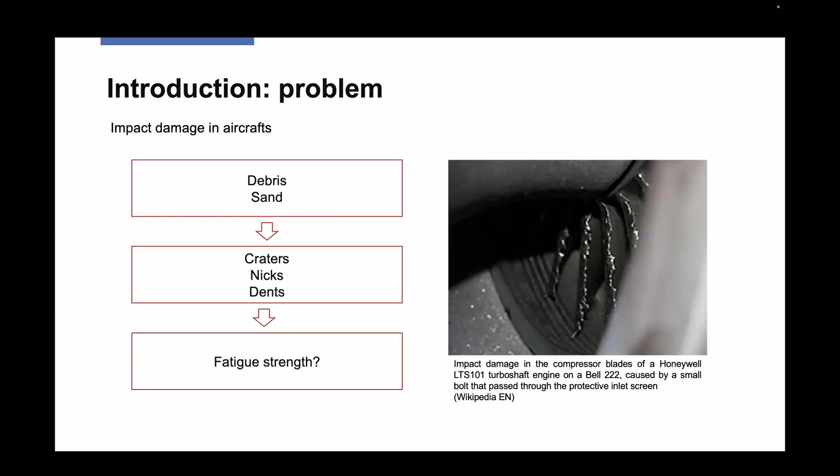So which are the mechanisms involved? We have the appearance of microcracks, of microstructural damages, and the appearance of stress concentrations that, as known, decrease the fatigue strength of components. But we have also the introduction of residual stresses that can improve or decrease the fatigue strength of the components, according to whether they are tensile or compressive. In case of compression, we have an improvement. In case of tensile stresses, we have a decrease.

It is the same mechanism of shot peening, more or less. In shot peening, you have a global effect, so all the surface of the component is under compression, or the area a little bit below the surface. In the case of foreign object damage or impact damage, you have a localized effect. So you have tensile stresses that are dangerous. In literature, the studies focus on plane and airfoil geometries, as just seen.

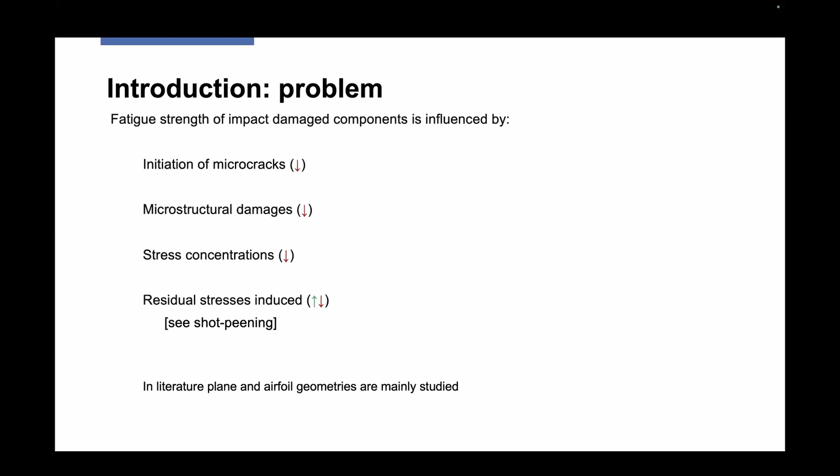And now we want to study other geometries. For example, for some years we have been studying the case of the impact of a sphere against an hourglass specimen made of 7075 aluminum alloy that is used in aircraft engineering. We are using an hourglass specimen because the objective is then to test this specimen under rotating bending loading and to assess the fatigue strength.

So in a previous conference in Dubrovnik, we presented a work on the study with a design of experiment technique, the Taguchi method, applied on the finite element results of some simulations. And in particular, we studied macroscopically the effects of the impact parameters on the stresses after impact in the axial direction. In the axial direction because we want to test this specimen with rotating bending stresses or cyclic axial stresses. We studied the effect of the impact speed.

We tested two levels of impact speed, of the material of the ball, steel and ceramic, the diameter of the ball, two impact angles, alpha and beta, that are measured on two planes perpendicular to each other, and the parameters E1 and E2 are the empty factors. So factors that formally have two levels, 1 and 2, but in practice they are 0. And they are used because after processing according to this methodology, you can see if you have forgotten some significant parameter: if the result of your calculation is that, for example, E1 is the significant parameter, then in your study you have forgotten something.

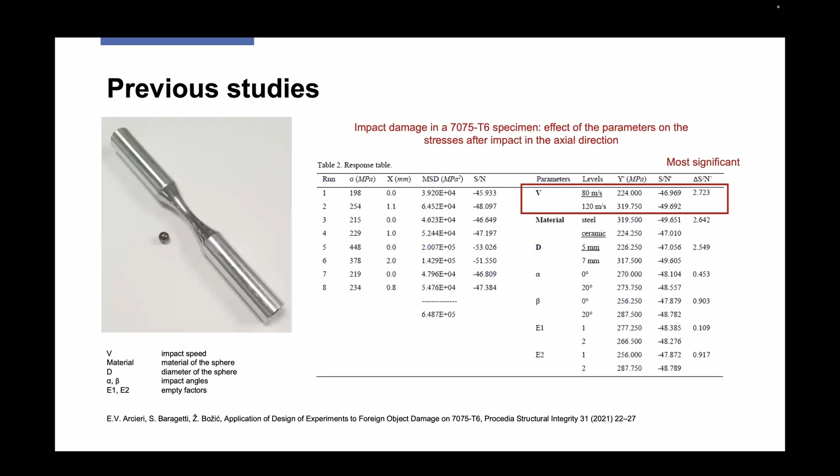And so for this reason, the objective of the presentation of today is to discuss how the impact speed influences the damage in a 7075-T6 hourglass specimen, to find the trends. And due to the fact that we have found that the impact angles are not as significant as the impact speed, we are considering only normal impact.

Here we have the finite element model created for the impact simulation. We have the hourglass specimen that is made of aluminum alloy with the mechanical properties reported. We used an elastic, perfectly plastic behavior. And then we have this sphere that is modeled as a rigid component. And so the inertial properties are set to the center of the sphere.

The boundary conditions are based on the test rig that we have in our lab. So the cylindrical parts are fixed in the specimen holder with 2 set screws. And we have placed the sphere very close to the hourglass specimen because we are neglecting the effect of air and gravity.

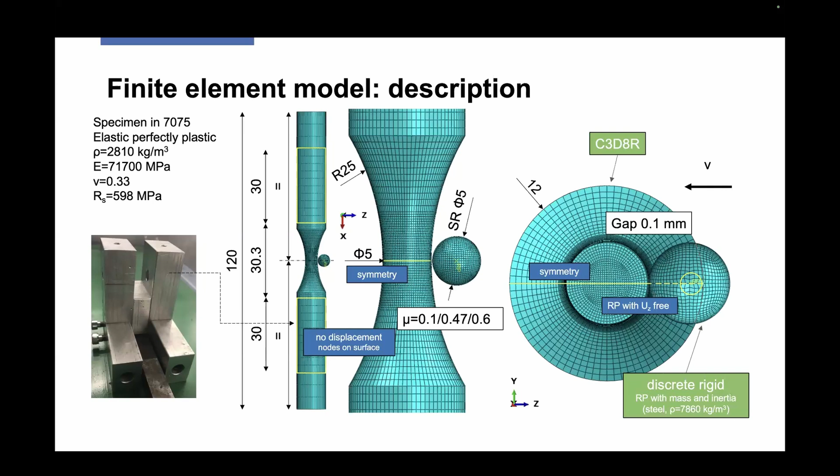Air and gravity. Sorry.

Okay, so we validated this finite element model for one impact case, an impact velocity of 100 meters per second. And here you can see what happens after the impact if we load the specimen with a rotating bending moment. So you can see different bending moment positions.

And first of all, you can see that the critical area, comparing with the results of the fracture surface of the tested specimen, is that we have crack appearance in the areas where the maximum axial stresses occur during a loading cycle. We simulated only one cycle using a static calculation.

And then we have also cracks propagating from the surface of the dent created by the impact, but we haven't simulated micro damages, and we have only an elastic, perfectly plastic material behavior, so we don't simulate it. What we can observe is this area where there is a step discontinuity.

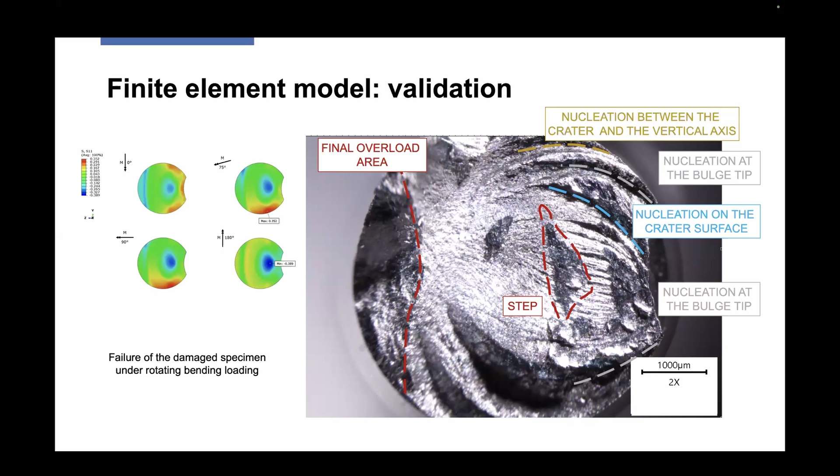This area, according to our finite element results, is subjected to compression during the whole loading cycle. So the appearance of the discontinuity can be due to the resistance provided by this area of compression. There is a time in which this area is surrounded by tensile stresses, and so the discontinuity appears. This finite element model, I repeat, was validated only for one impact speed.

So let's go to the objective of this presentation. We studied the influence of the impact speed on the dent depth, and as we can see, the trend can be parabolic or cubic. The R square values are very, very close to 1. But if we neglect the small impact speed, you can see that the parabolic trend is good. We have only a very, very small variation in R square.

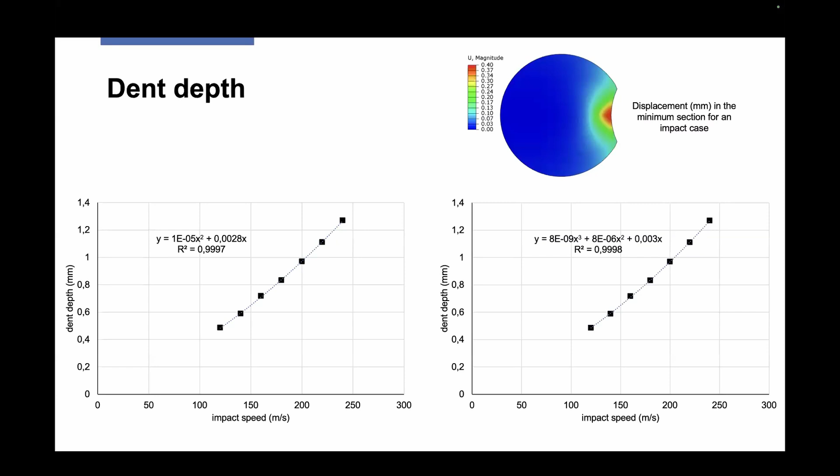What is strange is what happens to the axial stresses. Here we can see the trend for axial stresses in the whole specimen and in the minimum cross section where the highest stresses are expected to occur during the fatigue loading. So you can see that we have an increasing trend for very small velocity, then a decreasing trend, then again it increases and decreases.

It's a strange trend, and maybe there are a lot of motivations to explain it. First of all, the material law used, that is elastic, perfectly plastic. So we have a saturation of the stresses that the specimen can support. So when we have the elastic recovery, we have this trend.

The second reason can be that it is not the case of the impact of a sphere on a plane, for example, but when the impact speed increases, the area that resists the penetration is higher in this area, for example. Here, this area is a little bit higher than the area in the minimum cross section. And then we have a cooperation of a larger part of the specimen due to the higher penetration. So these are at the moment the possible reasons.

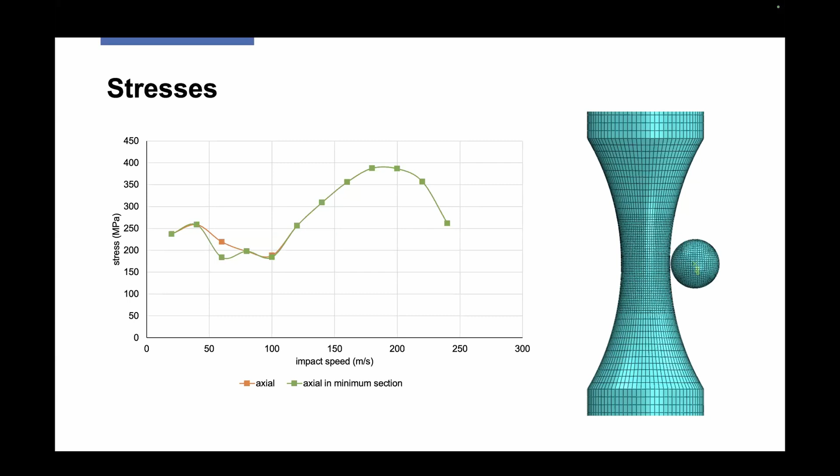Then we have no simulation of micro damages. It's possible that at high speed we have micro damages, and also some portions of the material are detached from the hourglass specimen.

So, in conclusion, I have just presented the finite element study to analyze the influence of impact speed on damage in a 7075-T6 hourglass specimen. The only conclusion on which we are more or less certain is that the depth has a parabolic trend, while for the axial stresses we have a strange trend.

Now we are working on the implementation of other material models. We are working on the Johnson-Cook model, also with damage, if we achieve our goal. And then we are carrying out also experimental tests at different impact speeds. And we want to study then the fatigue strength of the impacted specimen. And we want to study the influence of other impact parameters.

The final goal, but I think that we will reach it in many, many years, is to have a model that can predict from the beginning to the final step what happens. So from the impact damage, the dent depth, then the stresses in our specimen and the fatigue strength. So we are working also on multi-axial fatigue due to the presence of the dent.